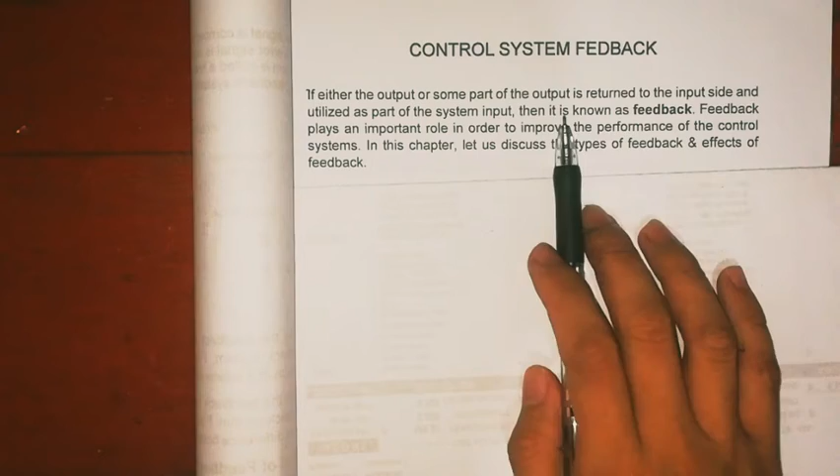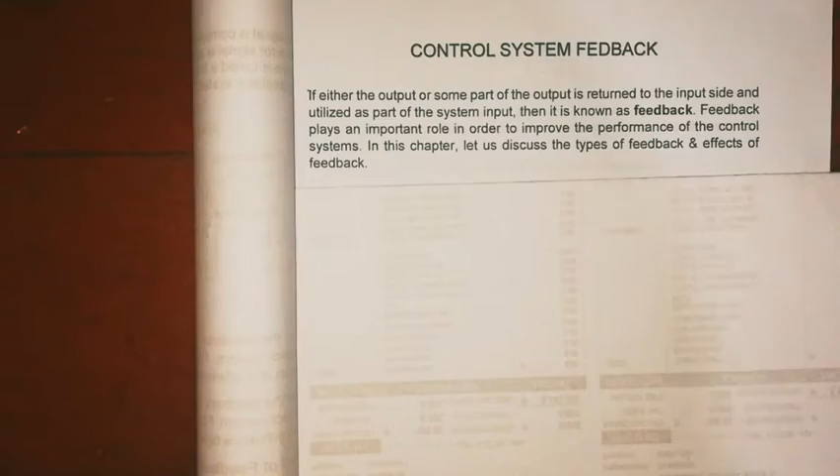Next topic is about control system feedback. If either the output or some part of the output is returned to the input side and utilized as part of the system input, then it is known as feedback. Feedback plays an important role in improving the performance of the control system. In this chapter, let us discuss the types of feedback and the effect of feedback.

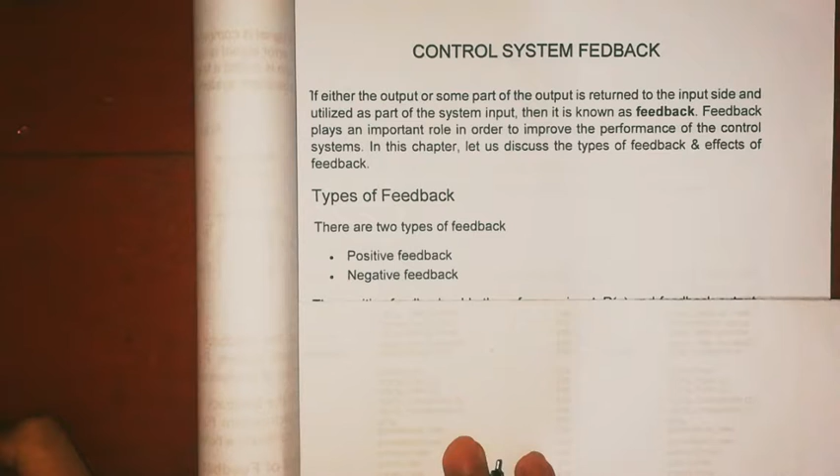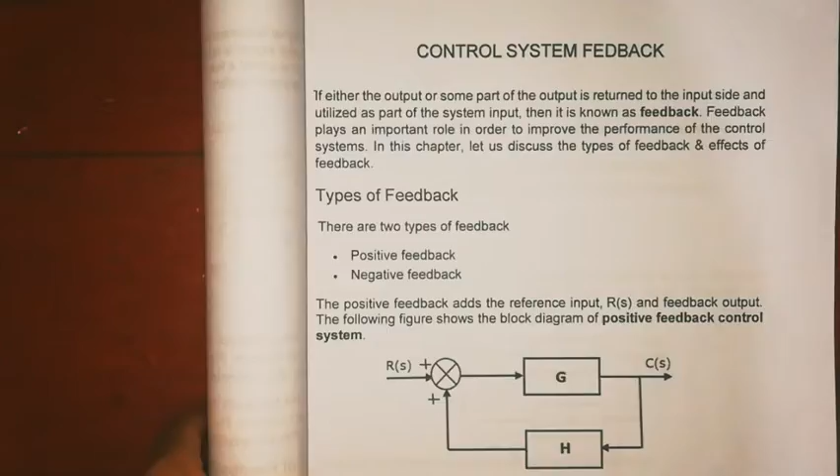So there are two types of feedback: positive or negative feedback. Here is a block diagram. This is a closed loop control system.

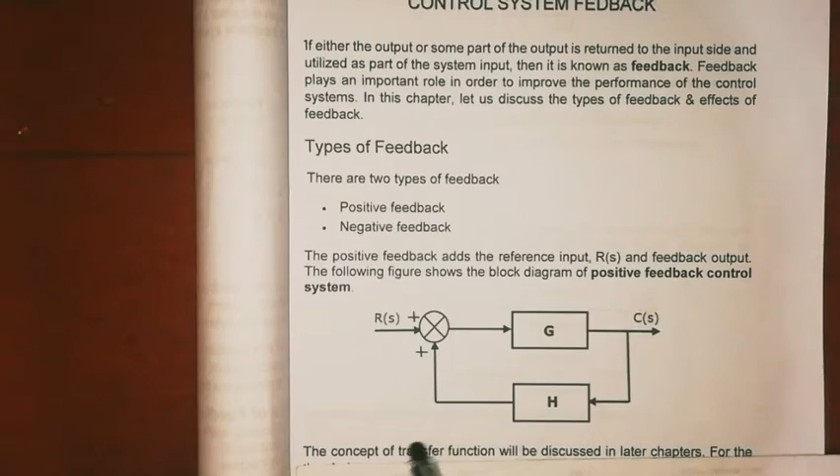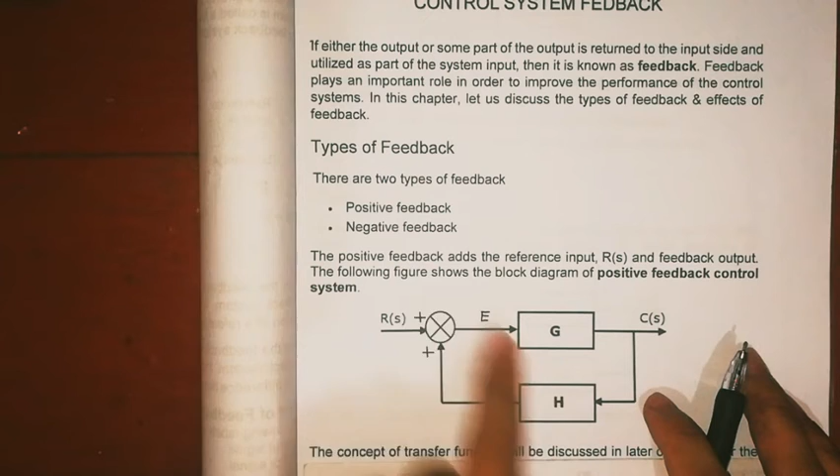The positive feedback adds the reference input and the feedback output. So from our previous discussion, this is E. The positive feedback, the reference input, is R(S) entering plus the feedback output, B(S) signal.

Because for positive feedback, R(S) plus B(S) is equal to the error E. Then for negative feedback, R(S) minus B(S) is equal to E.

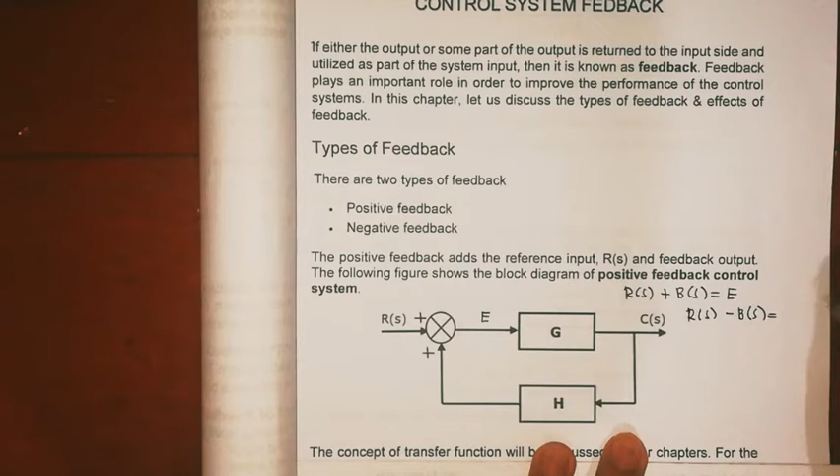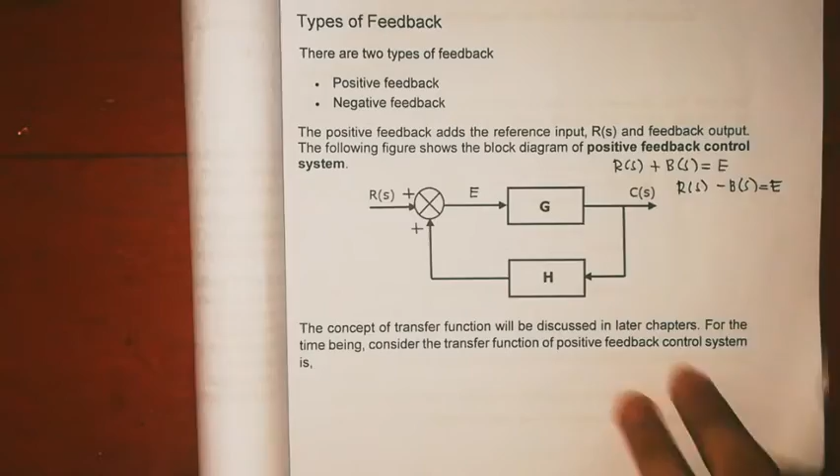The concept of transfer function will be discussed in a later chapter. For the time being, consider the transfer function of the positive feedback control system. Let's compute the transfer function. So for positive feedback, T is equal to G over 1 minus GH.

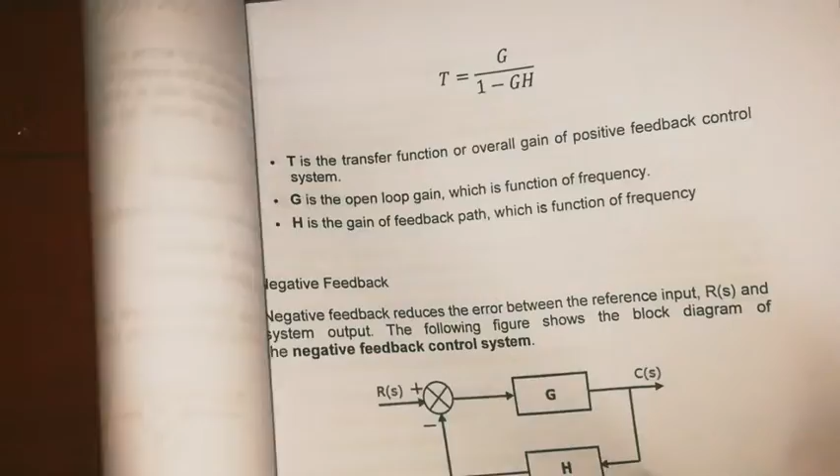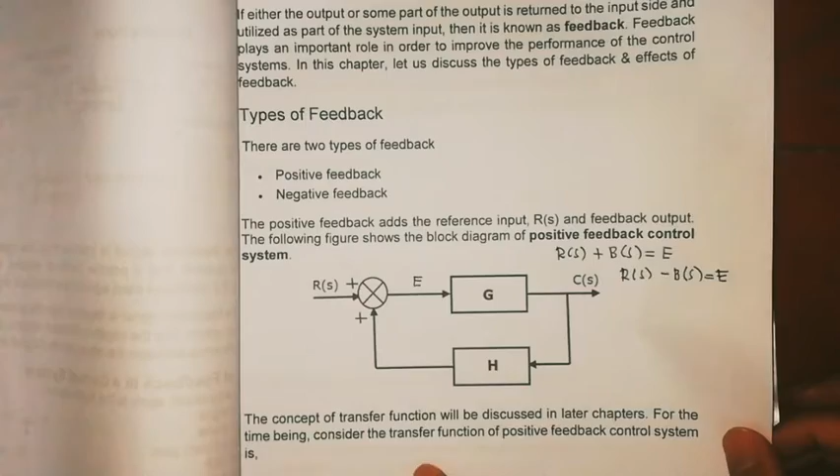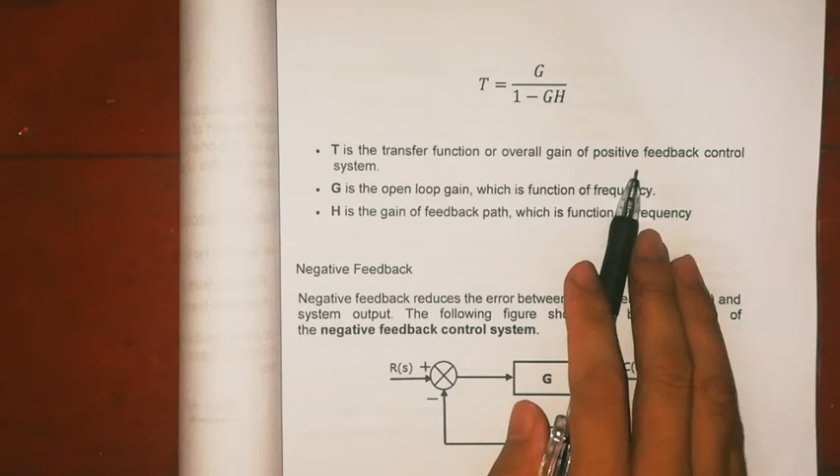So for positive feedback, T is equal to G over 1 minus G times H for positive. So T is the transfer function or overall gain of the positive feedback control system, while G is the loop gain.

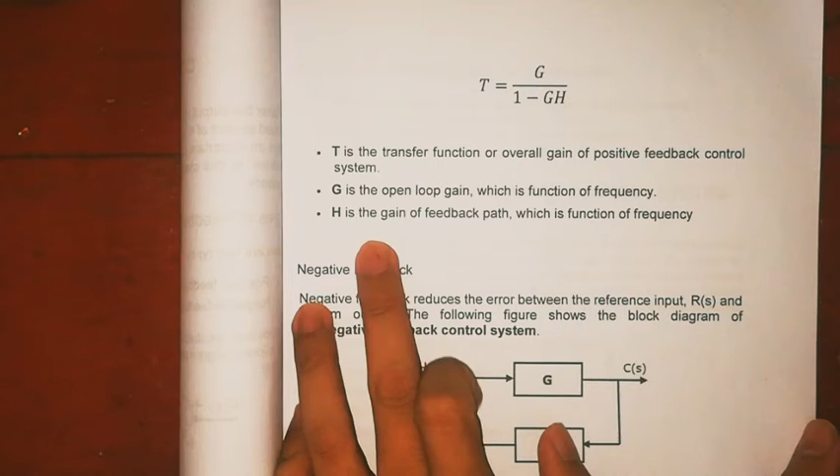G is a function of frequency. H is the gain of feedback, which is also a function of frequency. So both G and H are functions of frequency.

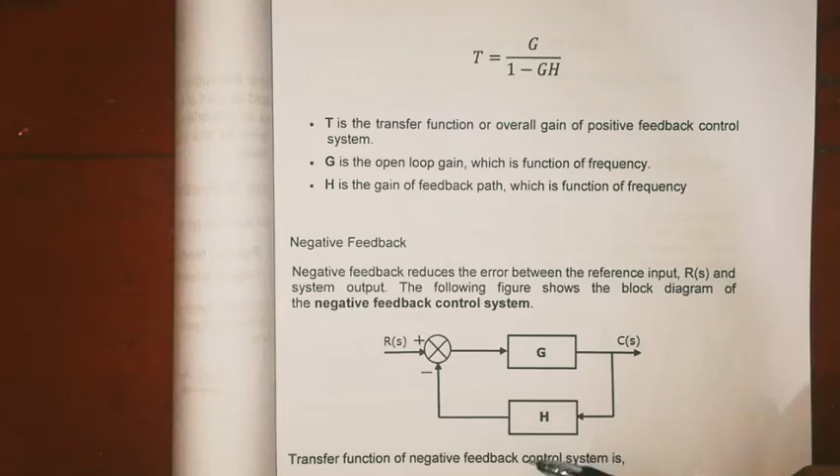So if we remove this, that becomes the loop gain, G. The loop gain. H is the feedback path gain.

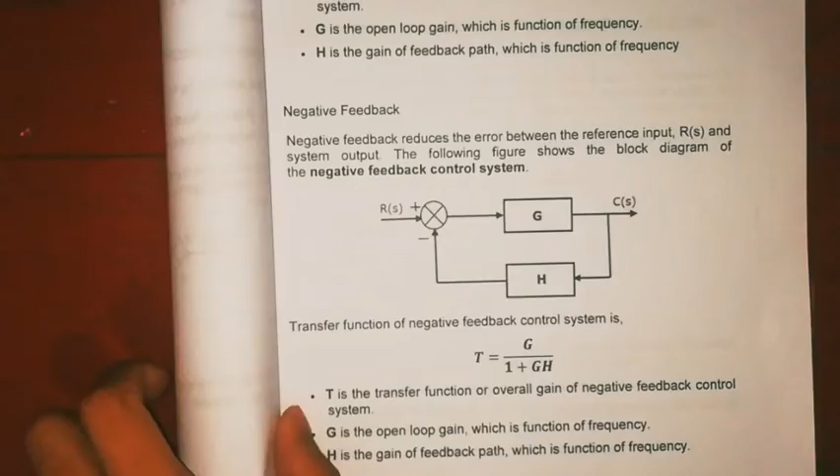So for negative feedback, it reduces the error between the reference input and the system output. The following figure shows the block diagram of the negative feedback control system. So the transfer function of the negative feedback control system is T equals G over 1 plus GH.

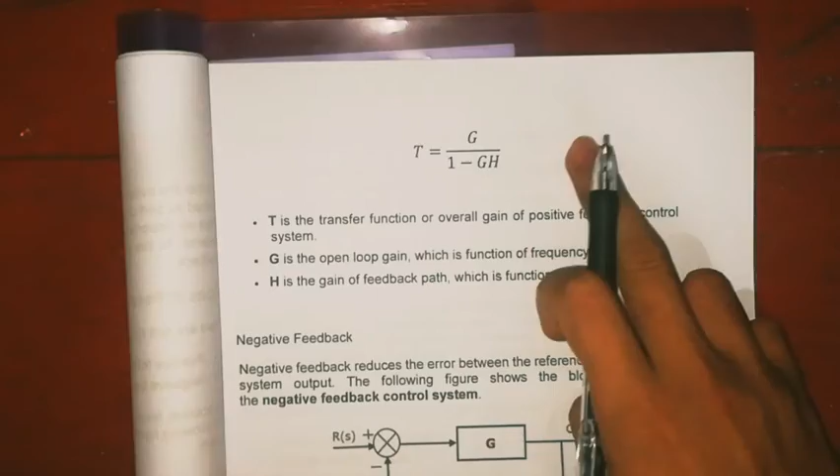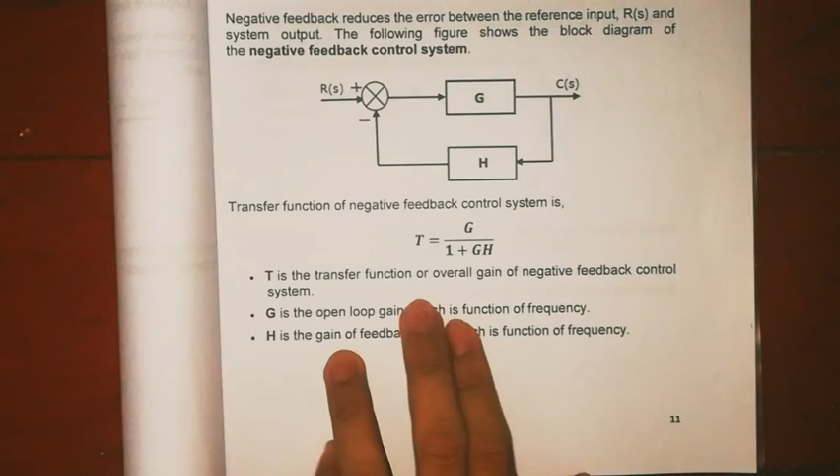Remember these two formulas. This one is for positive feedback; for negative it's the opposite sign. So for positive it's minus, for negative it's plus below. So T is the transfer function or overall gain of the negative feedback control system. G is the loop gain.

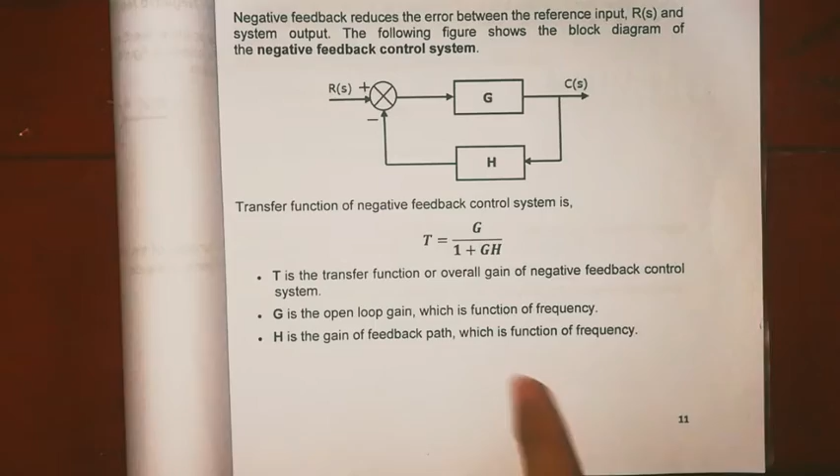Open loop — if you remove that part, that's the open loop. So G is the open loop gain, which is a function of frequency, and H is the feedback gain of the feedback path, which is also a function of frequency.

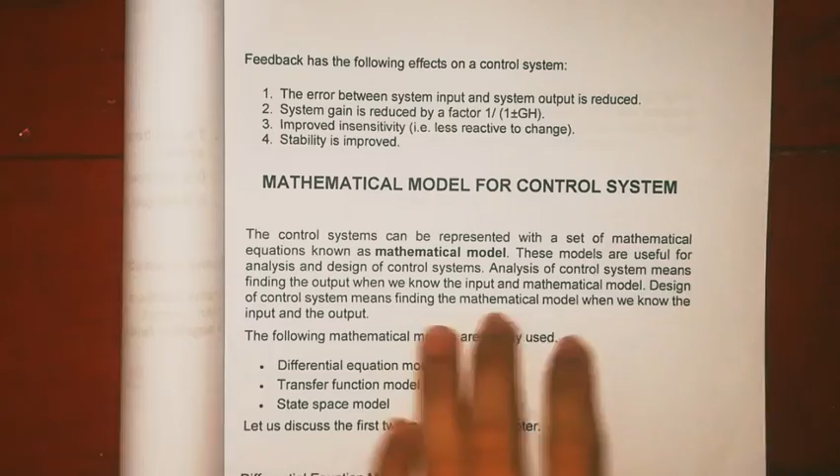So feedback has the following effects on the control system. First, the error between the system input and the system output is reduced. Because of feedback, the desired output is attained — it reduces the error, improving the desired output of the system.

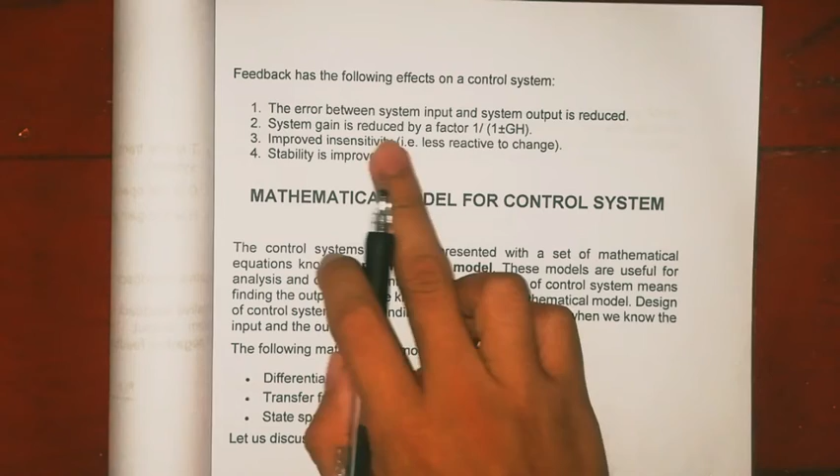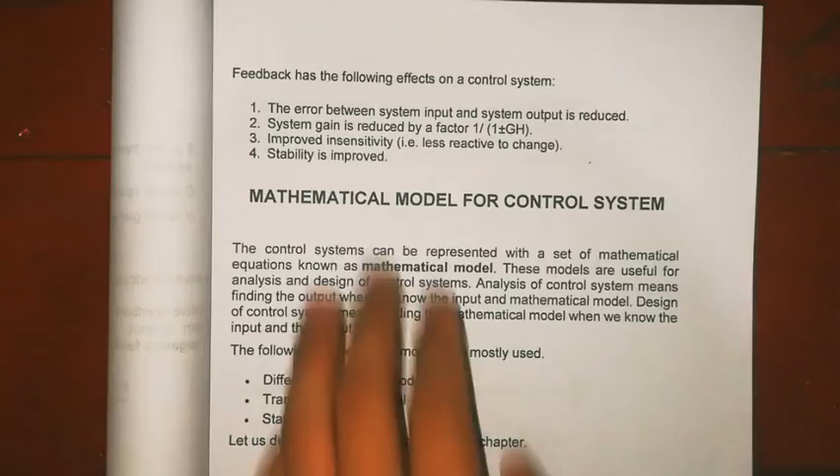System gain is reduced by a factor of 1 over 1 plus or minus G times H. This is the transfer function, or the system gain, which is also T.

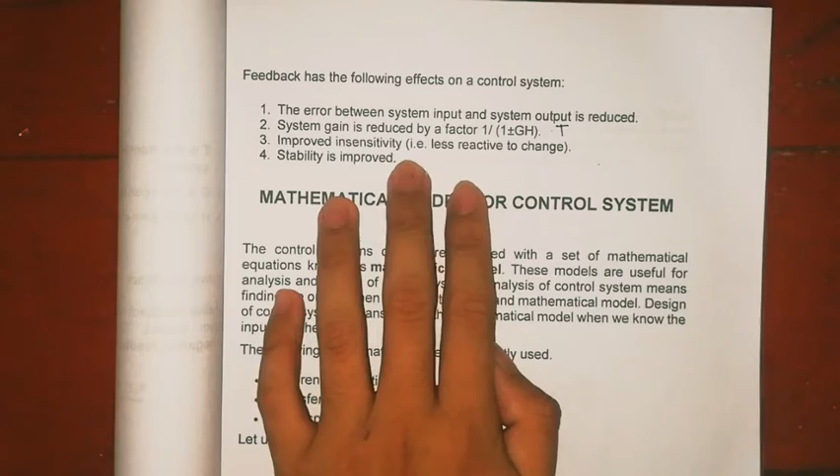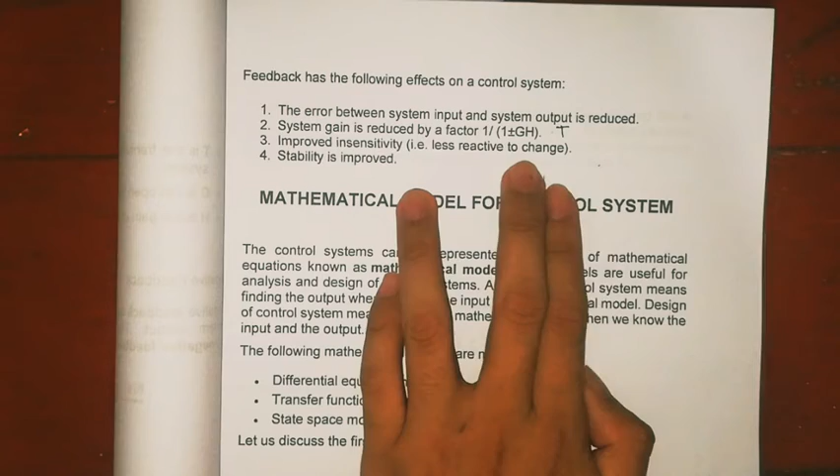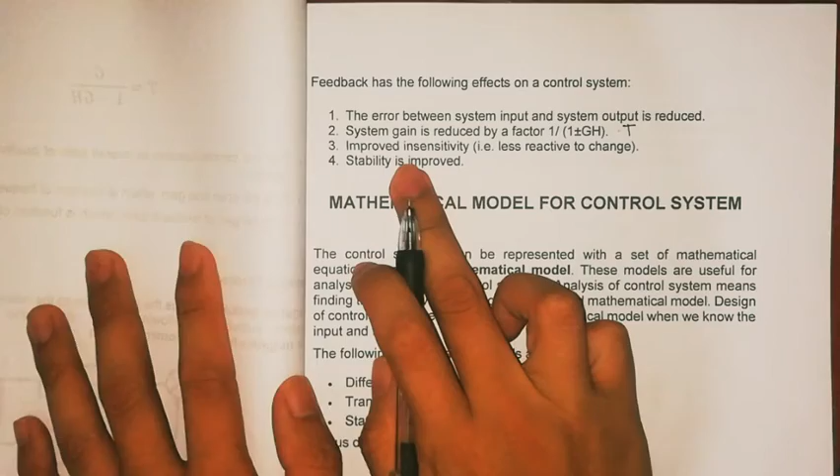It improves the insensitivity, making the system less reactive to change — meaning it's sensitive only to the input, but insensitive to environmental conditions while still sensitive to the input signal.